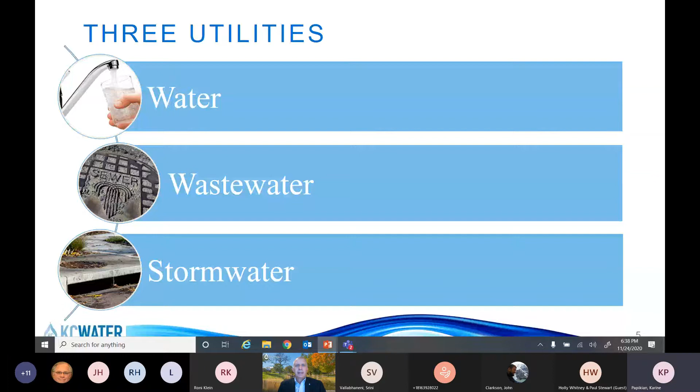Next slide. The reason that we need to have those bills is because we have to not only create new assets like we're talking about tonight, extending our sewer system, but also operate the existing assets. On the water side, we have a single large water treatment plant north of the river, 18 pump stations, and several thousand miles of water mains. On the wastewater side, we have 6 wastewater treatment plants, 39 pump stations, about an equivalent 3,000 miles of sewer main. And then for storm sewer, we also have about 600 miles of storm sewer and everything that goes along with that stormwater system. So thank you all for joining us tonight.

If you have any general water department questions, I'm going to try to monitor the chat line. You can put your name and phone number in the chat line, and we can follow up with you later, or you can ask questions at the end of the night tonight. But we'd really like the focus to be on this sewer extension project. Again, if you have other questions about the water, wastewater, or stormwater utilities, we'll attempt to answer those as well. So go ahead, Karine, next slide.

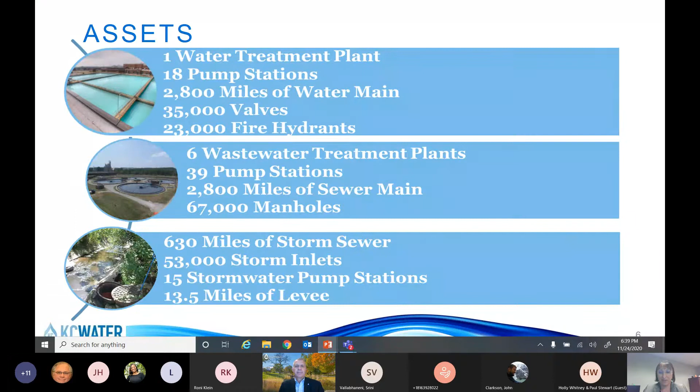Thank you, Matt. So as I mentioned, our meeting tonight is to provide information about the proposed sewer extension and the cost to the property owners. The funding for the proposed sewer will be provided by a special sewer assessment bond approved by voters, and from the subsidy program. The current subsidy from KC Water will pay for 50% of the construction cost. Additional funds were made available by city council approval for these districts through the city's Public Improvement Advisory Committee, so-called PIAC program, to further assist in the funding of the sewer and KC Water sewer connection.

We also have a program called the KC Sewer Connection and Septic Tank Closure Program that will assist in disconnecting your septic tank system and connecting to the new sewer line. It applies to families with below moderate income. We here in the Water Department can assist you in the application if you would like to make a request.

The format of the meeting is outlined in this agenda that you see on the screen. We will first present a brief history of the existing sewer assessment program and explain the process, then provide project information, detailed schedule, cost, and tax billing information.

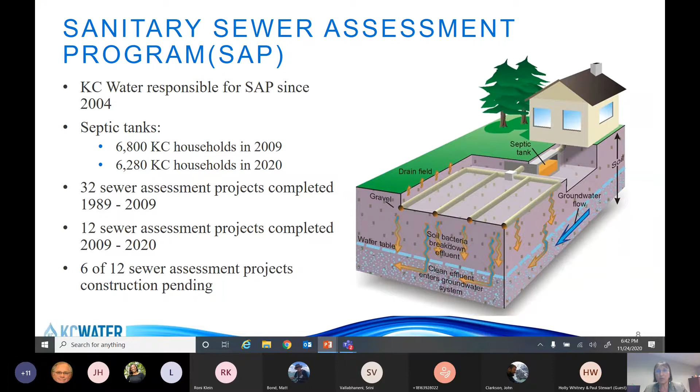It starts with indication of need, which is when we receive a request for public sewer service, maybe from a property owner, or just a phone call or a simple email. When such a request is made to KC Water and received, we assign a project manager for that process. The preliminary investigation then starts. The project manager conducts card inquiry, collects water samples, reviews and evaluates potential sanitary sewer service for the area, related environmental issues, prepares a preliminary plan, defines sewer districts and cost estimate.

When all this work is done, the next step is declaration of necessity, because as a result of the preliminary investigation, the declaration of necessity has to be adopted and entered into record. This is actually the first official legal step in the process.

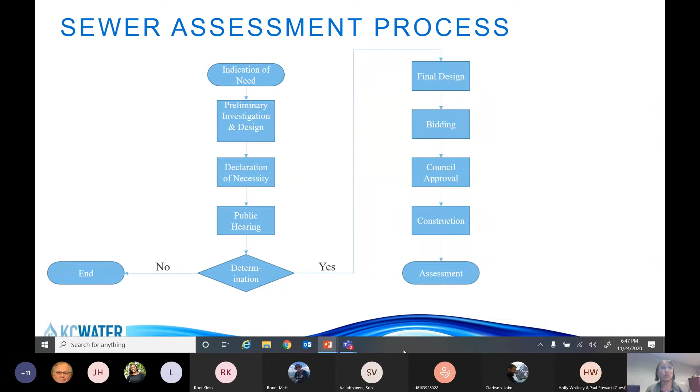The preliminary investigation for phase 2 extends back to at least October 2002, when water samples were first collected. It's likely the investigation began prior to this time. The declaration of necessity was issued January 20th, 2004, and a public meeting was held the same day. The determination letter was issued by the Director of Public Works on March 31st, 2004.

Water samples collected in October 2002 and December 2003, on both occasions, significantly exceeded the acceptable limit of 2,000 fecal coliform colonies per 100 milliliters of water. A second letter was sent November 19th, 2004, stating an additional investigation was conducted on November 12th of that year to determine if the health hazard problems that triggered the project were corrected. The results indicated the area continued to experience septic tank seepage, and the project would...

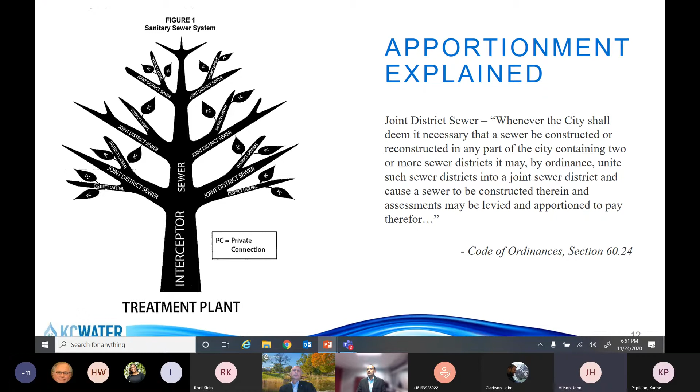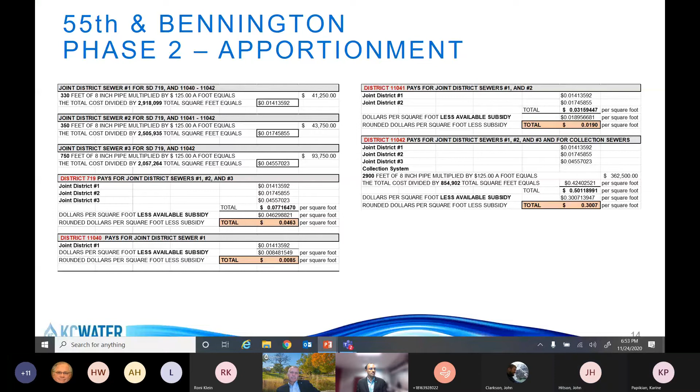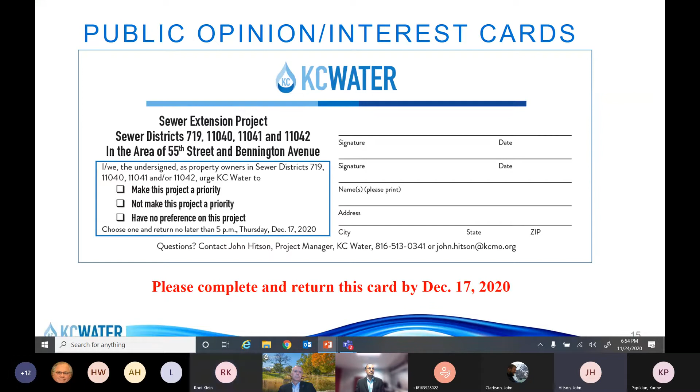After the responses are received, if favorable, the design firm responsible for the original drawings will begin to update them and make sure that their plans are still applicable and feasible. The process is expected to take approximately 6 months to complete. From that time, it is expected that an additional 6 months will be required to obtain all the easements required for construction. Once the easements have been acquired, the project will go through the city's standard advertisement process for construction bids, which is expected to last approximately 2 months.

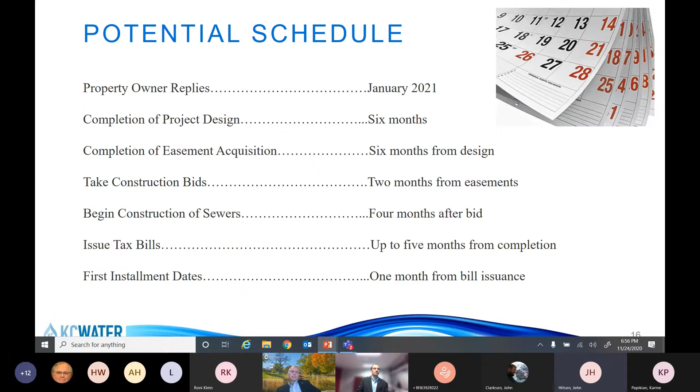The bid selection and contracting process immediately follows. It normally takes 3 to 4 months, and then after that, construction will commence immediately. The tax bills are issued after the construction project has been completely closed out and the final balances have been paid to the contractor. This closeout process can take several months, so we tried to estimate conservatively that the bills are expected up to 5 months after this time.

And so that concludes the general presentation of information.

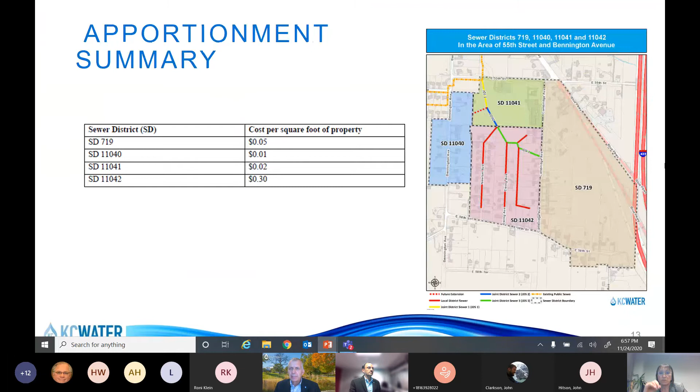John, let's go ahead and leave it on slide 13, please. Okay, just put it on slide 13, and then it looks like we have the names of all of our participants for those that have entered, so we will have your names for follow-up.

I do see one phone number, 816-392-8022. Could you please identify yourself? If you're able to identify yourself, we'd appreciate that. You may be logged in on the computer as well. 816-392-8022.

Okay, let's go ahead and take additional questions. Hey guys, did you say you want the questions submitted in the chat, or is verbal okay for this forum? Let's try verbal. Okay, chat too, okay - there is one on chat.

But go ahead, Jason. John, would you like me to read the question? There is a first question I see here: when was the public hearing? I believe John already responded to that question - did we answer your question? It's on the screen right now, actually. A public meeting was on January 20th, 2004.

And the second question: how are sewer bills calculated? You're talking regular bills, or the sewer assessment? Assessment, or regular monthly bills, or however often they're billed. That would be good, so I'll take that.

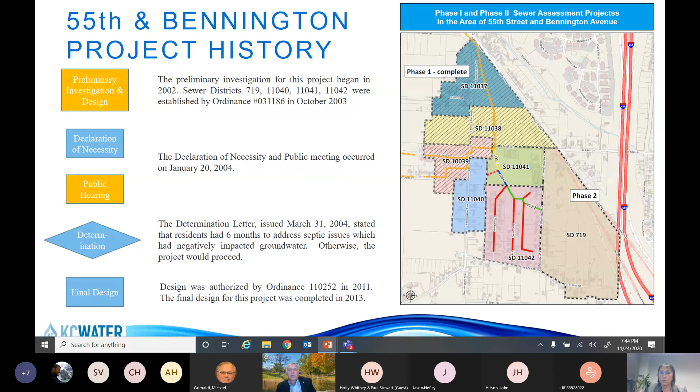Hey, Mr. Bond, you guys have been really transparent and great. It's been a good call, but there are several follow-up items that ought to be pushed out to the attendees of this call, as opposed to hitting up John and Karine one-on-one. Is that a possible option?

Well, certainly if there's a major change in the environmental samples and readings, we'll definitely get back out with all of you, probably with another update, but we'll come up with some way to update you all. You can also check out the project website. Before there's any other major update, there'll be another opportunity for you to provide input and understand what's going on. So that's a long way of saying yes.